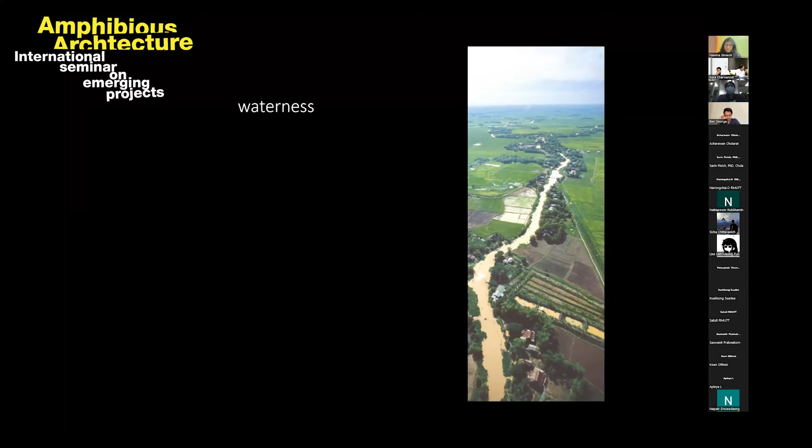In Thailand, the environment is filled up with water, it's an agricultural country. So it's always filled up with water and waterways. Living along the river, we need to face the condition of the river, that at times there can be some flooding.

In Thailand, the point of view to architecture in the past is very accommodating with nature. For example, we are in a hot, humid country, so maybe we don't need that very physical architecture like compared to the West, because we only need some protection from the heat of the sunlight. Maybe we lift up the platform to escape snakes or animals that can do us harm, and the breeze can flow, so that may be all we need. In the past we have lived our lives integrated very well with nature. We don't see like in the modern time, the city we see today that's really trying to go against nature.

So our way of life is integrated with nature. You can see this is the image of the city in the past. You can see that we actually live in the water. This is not for the future, but this is our past. We live on rafts, in the water, in the boat. When I was young, along the river and the canal in Bangkok, there would be filled up with boat houses. People actually live in the boat and in the water, and become like a part of the city. So you can see there's a lot of what you can call amphibious architecture.

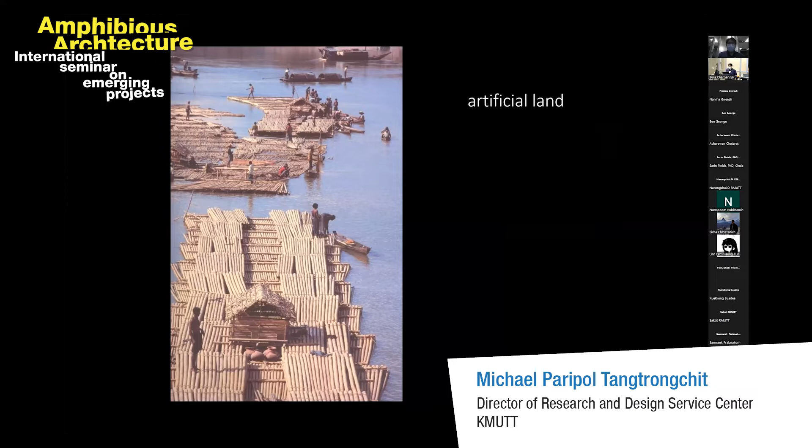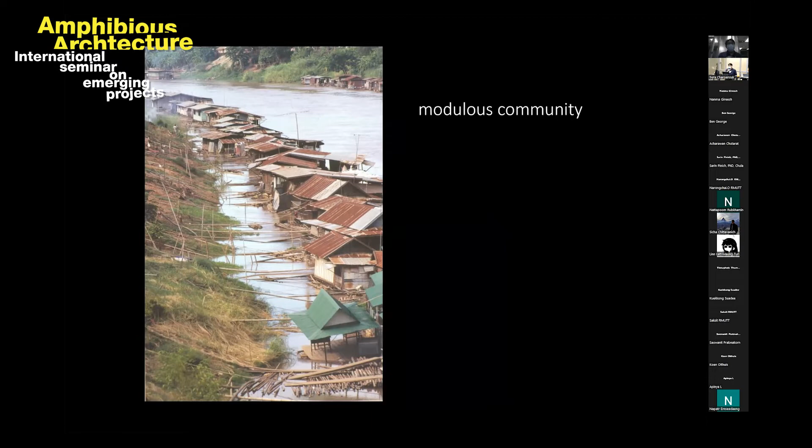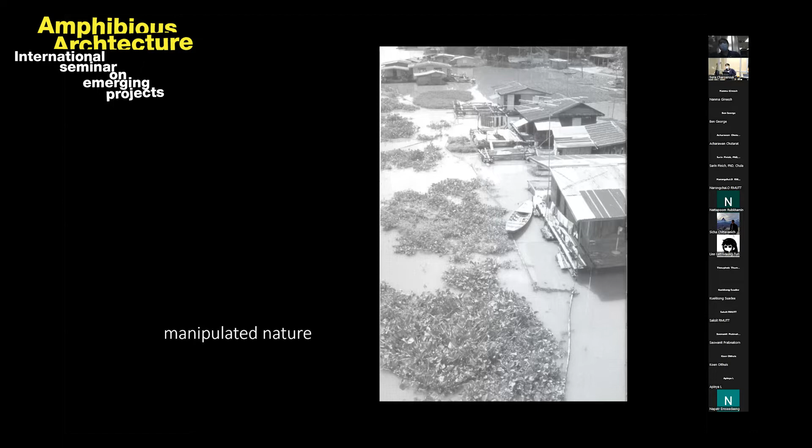More and more the communities are settled along the river bank, maybe some still in the water. They have this temporary bridge that connects the houses together with the land, creating a community along the water. They can even have an aquascape, or landscape in the water. Together with the house, they also have their landscape, and materials for cooking, for eating, for food, and of course the fish you can get from the water - you can get the meat from the water, you can get some fish. And the way of transportation is the boat, it's almost like a highway.

Then again, maybe people start to think that okay, we need more stability, so we start to create some kind of architecture that lives on the edge between land and water. You can see the house maybe is built on the land, and then the platform or the shared space or the activity space can be in the water.

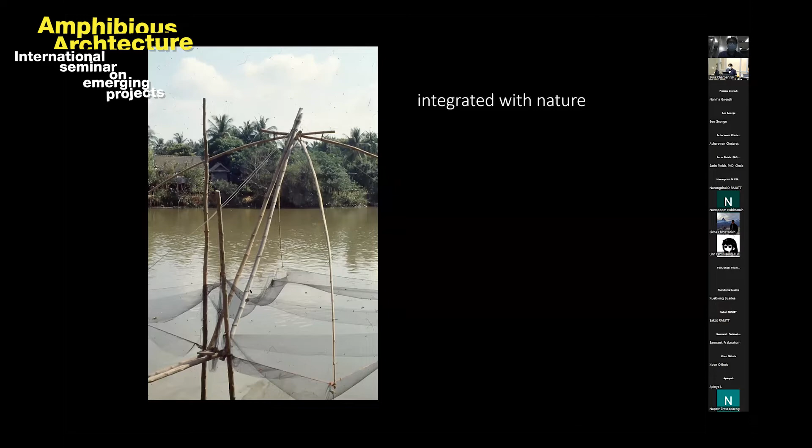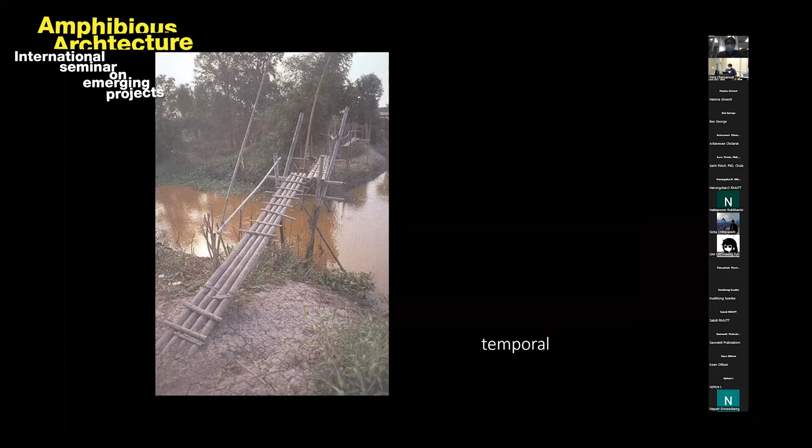Okay, so that's the kind of way of living, and the structure is very flexible because we live in nature, and the bridge can be removed, and it can be very simple. You can see the structure is very temporal, very very simple, and we can call it very nomadic.

It's almost like Mongolian, because we can move the house in different locations if there's some change in terms of the waterway, or there's some drought, or something like that.

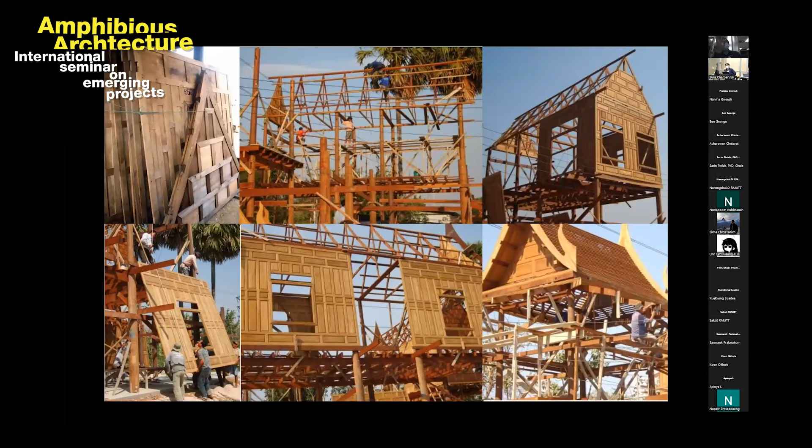So our architecture is prefabrication. This is the traditional Thai house. All the pieces can be taken away. We can take all the pieces away, and you can move the whole house on the cart or on the boat to another location and rebuild it. Almost like a Lego, it's a Lego house, so you can assemble and disassemble the structure very easily, with help of your neighbors or something like that.

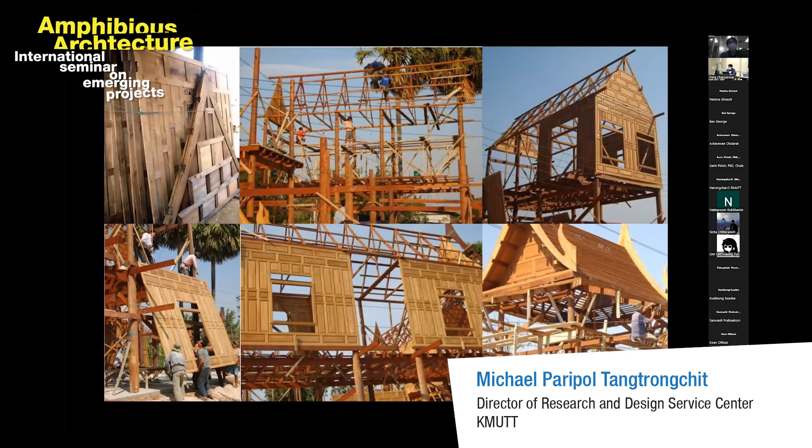Okay, so this we start to get more. You can see some trace of this situation. Okay, I will go to another side.

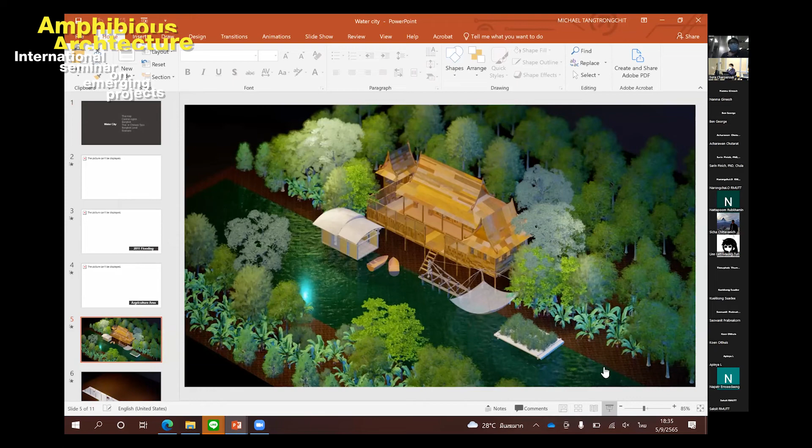Okay, this is like what you just saw in the picture, right? And when the water comes up, you can still survive because the house does not get affected.

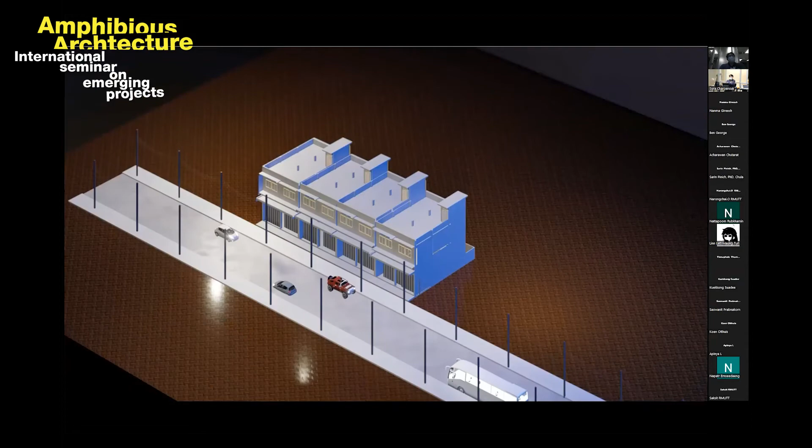But later on, we build like a modern city, like a land-based city. I would call it a land-based city. So now the problem of flooding is very, very, very high because we don't respect nature anymore.

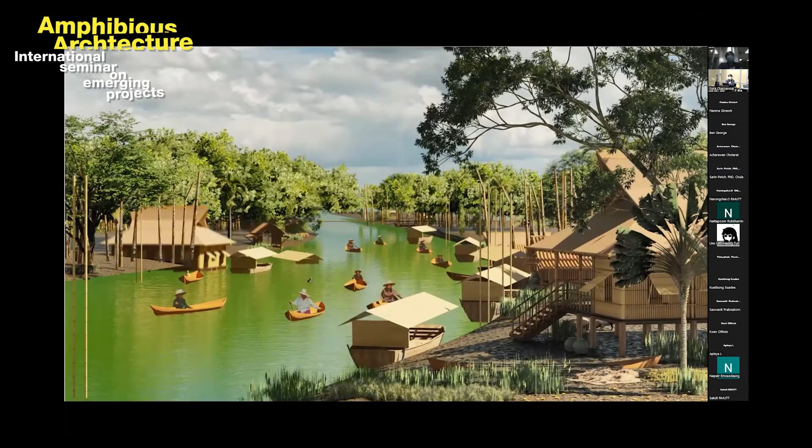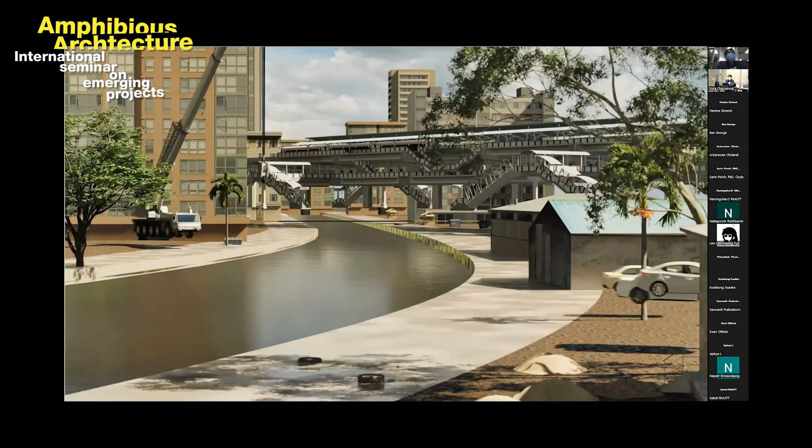And then from the feeling that, okay, we live in the past, and living well with nature in the amphibious architecture, we start to have this kind of land-based city. And then we even need to build a dam to cut off the natural system because we don't want the flooding, and then it becomes land-based, and we are so afraid of the water.

But in the past, we don't care. We just be able to live with water, right? So this is the section of Bangkok.

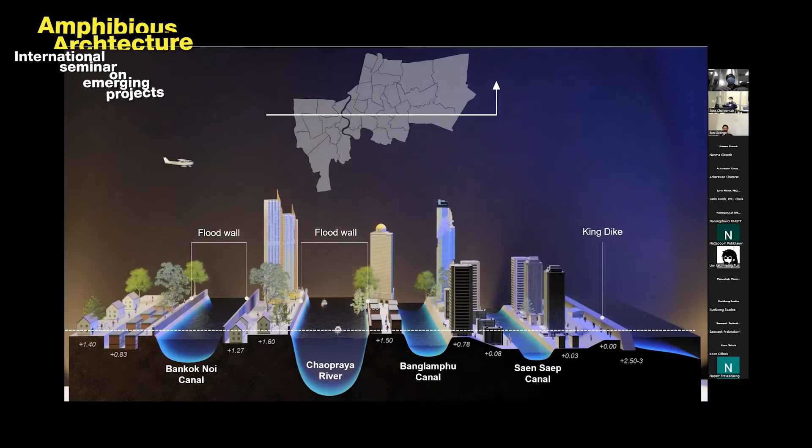So actually, if we notice very well, we get into the detail. Every other, let's say 400 or 500 meters, you will see some kind of network of the canal. But now you cannot see because it's maybe hidden underneath the roadway. Yeah, the trace of all the water system is still there in Bangkok, but then sometimes you cannot notice very well.

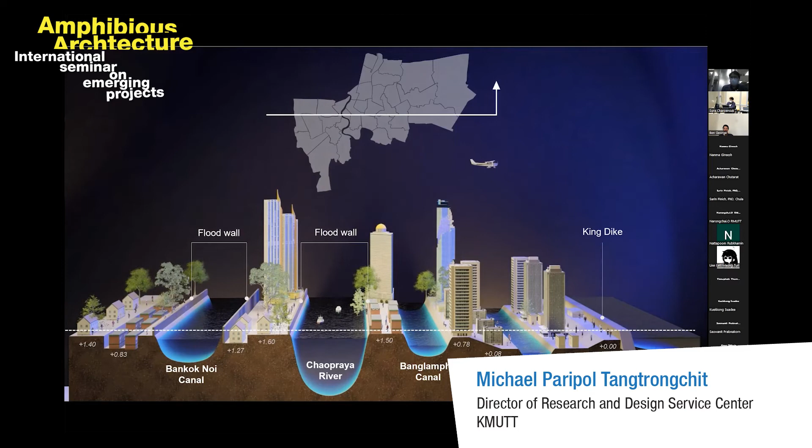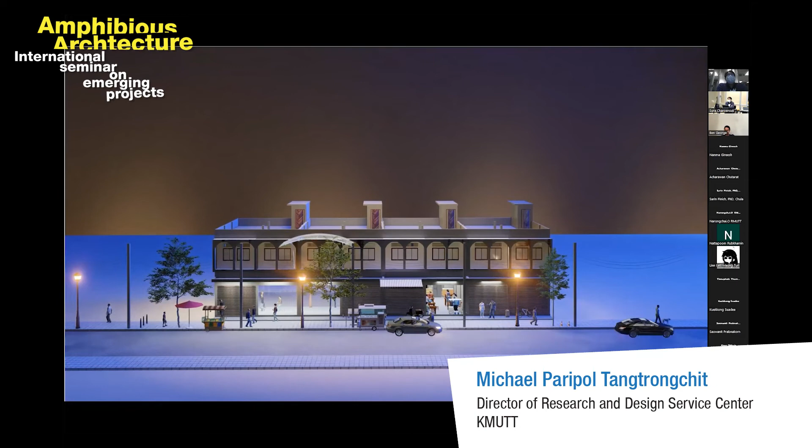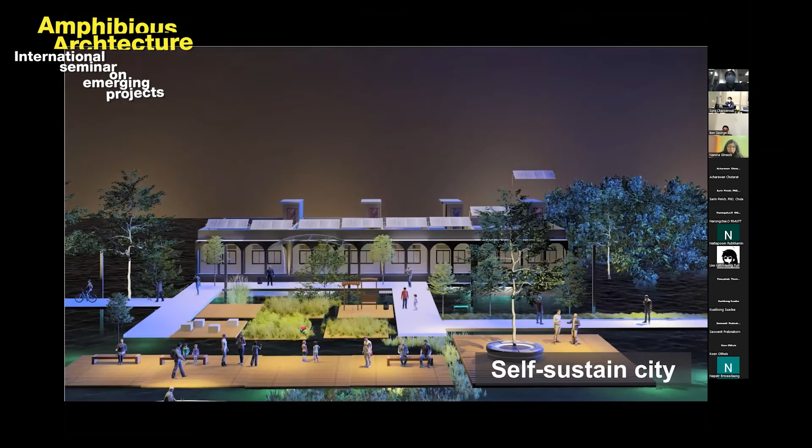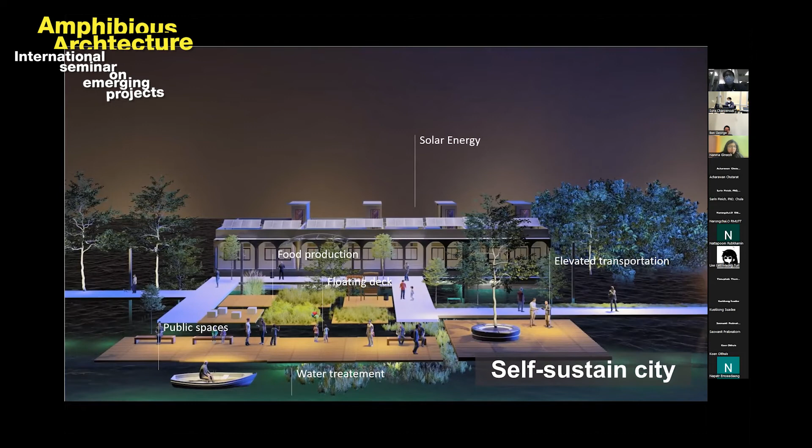So we are having the question of what kind of architecture would then be best for the area where there's also dry and then flooding. So it means that this kind of architecture maybe doesn't fit well with the flooding. Maybe we need to redesign it a little bit, to say, okay, maybe there can be some kind of infrastructure or self-sustained city where you are considering the flooding as a part of way of life and as part of the living city, where you can live with it very well.

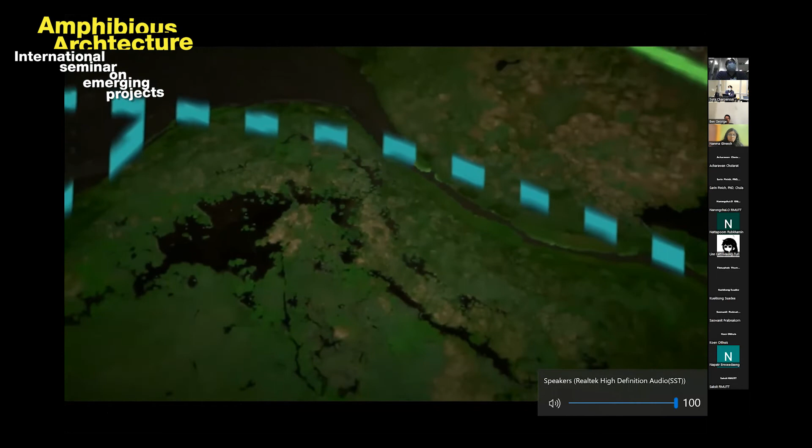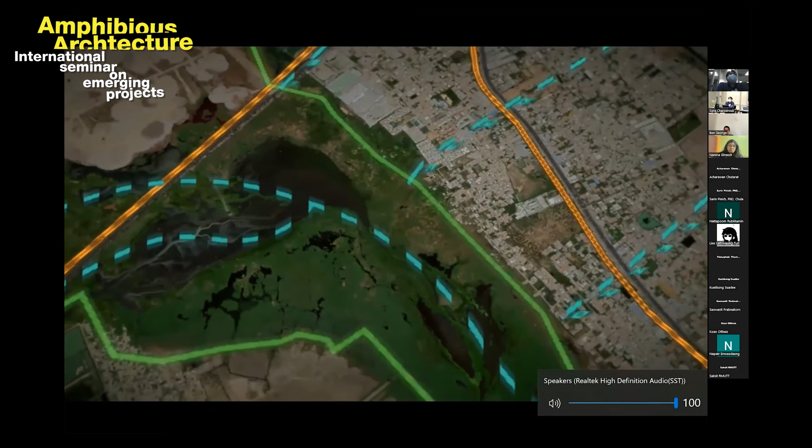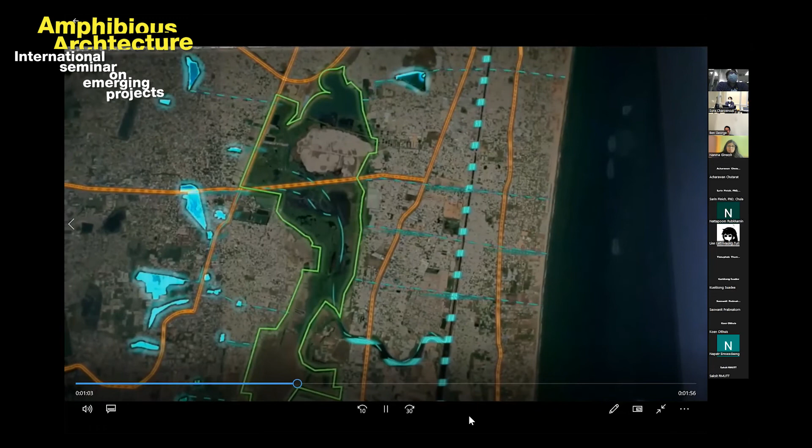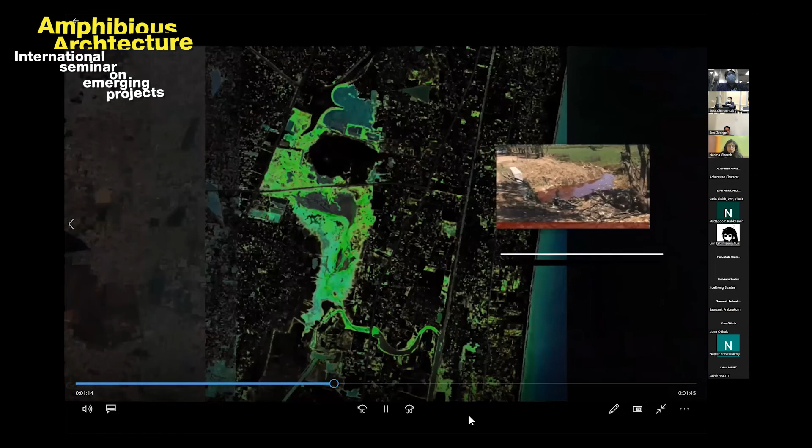This is in Chennai, India. So they analyze the city. They're facing the same problem as Bangkok.